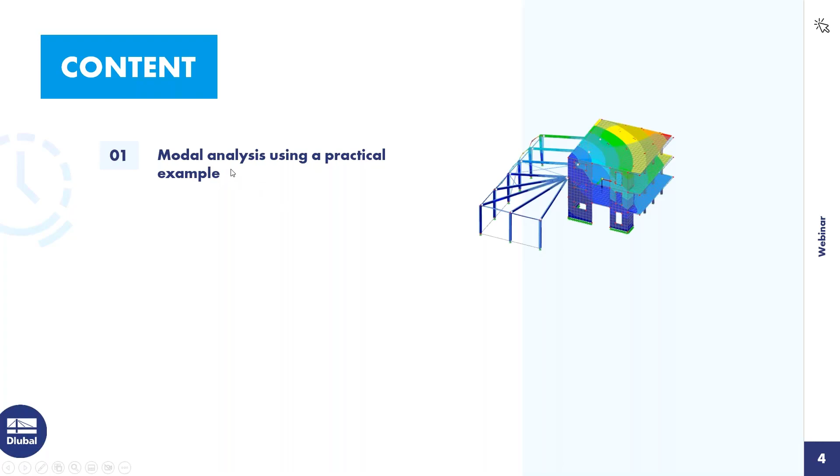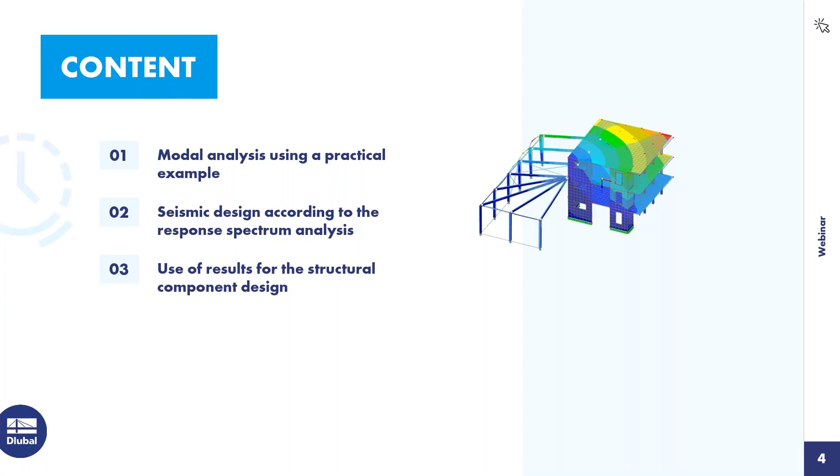To the agenda today, Stefan will start with this example, a building of concrete and steel, and he will do a modal analysis using this example. Then follows the seismic design according to the response spectrum analysis. Then he will show how you can use the results for the structural component design, and he will apply the add-on Building Model, for example, the shear walls, the forces in shear walls. Okay, then I hand over the screen to Stefan and he can start with the live presentation.

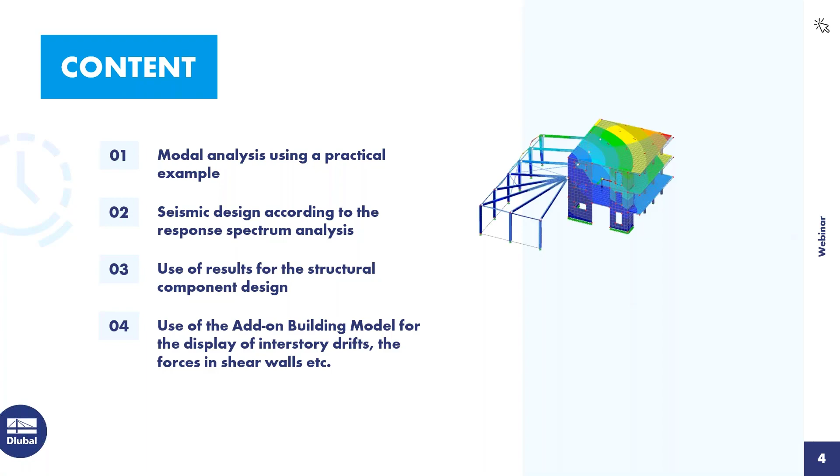Okay, thank you, Andreas. So then I think we can start here. Hopefully you see my screen. You see here a normal concrete structure. It's, for example, an office building, and here we have a steel frame structure, which is added to this concrete building. And for the whole structure, we want to do today a modal analysis and

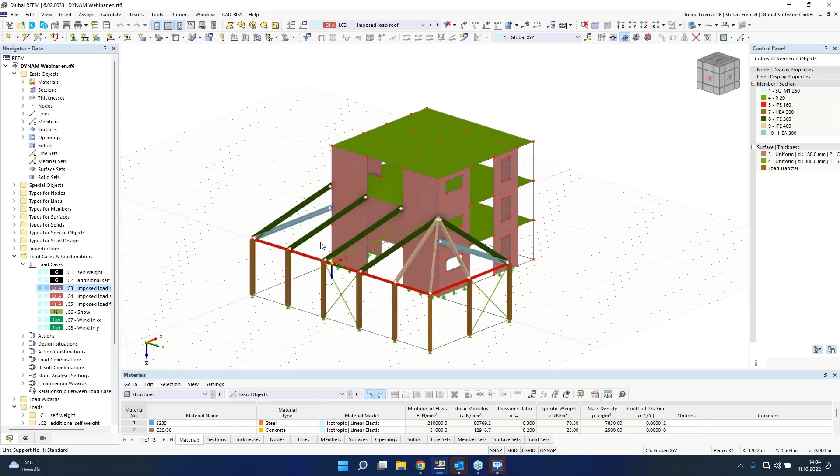a response spectrum analysis. You see, we have here different types of surfaces or thicknesses of the surfaces. So we have walls with 100 millimeters of thickness. We have here some plates with 300 millimeters of thickness, and of course, different cross-section types. So that's a regular building in this case. And at first, I want to show you what we have already in the structure.

Therefore, we can see here self-weight. It's the self-weight of the structure, therefore we don't activate here the loads at all, but you can also activate these loads. We have here an option for self-weight. We can activate this or not. It's just a structural self-weight. Another load case is an additional self-weight, which comes for the concrete surfaces. And of course, here some imposed load cases for the roof, for the second floor, for the first floor. These loads we want to use also then in the modal analysis.

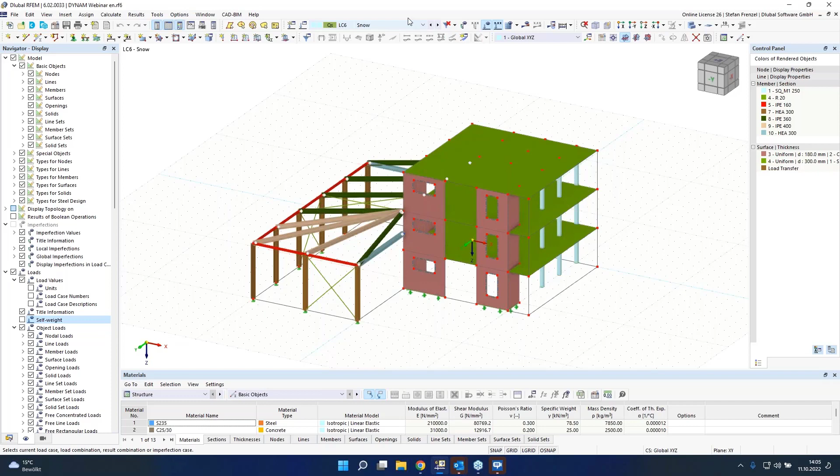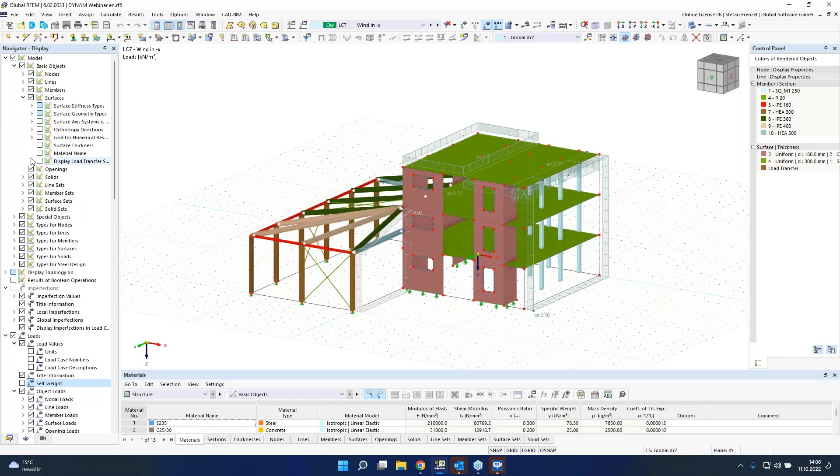And of course, you see here a snow load, which looks empty, okay. We can create a snow load, that's no problem. And of course, a wind load. For the wind load, you see that we have here already a surface load, which is applied here on this opening. So in RFEM 6, we are able to apply loads on such openings, and therefore we have here a special surface type, which is called load transfer surface. This load transfer surface is able to transfer the surface load to some elements.

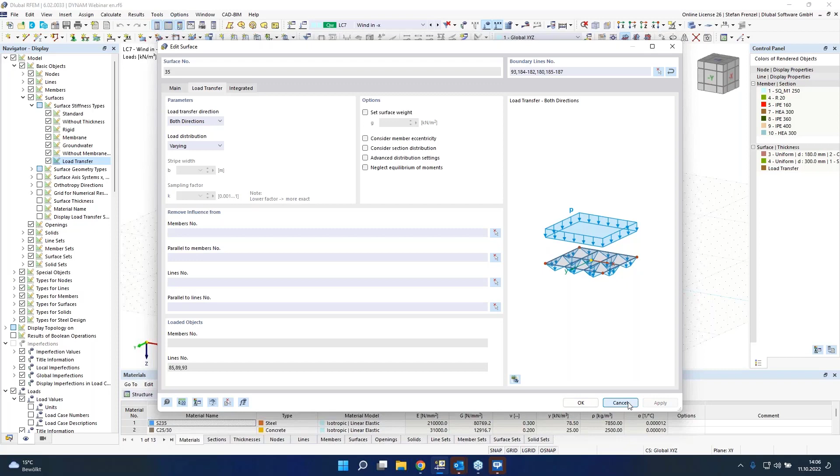For example, I will have a look in this one, and here I can see, okay, I will try to transfer the load to these lines, which are the lines from the floors, and therefore it's possible to use such a load transfer surface.

Here, of course, we have a wind load case also in the other direction. These wind load cases we want to use afterwards to compare the results between the earthquake calculation and, of course, the wind calculation. And maybe we will be able to use the wind calculation for the design checks afterwards.

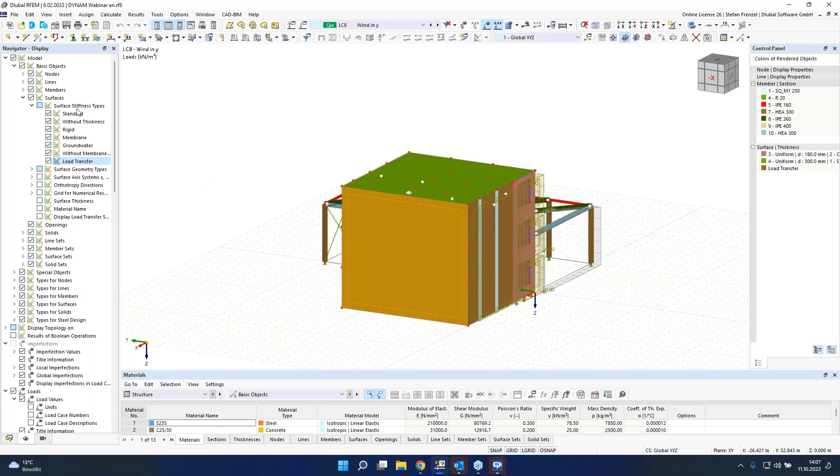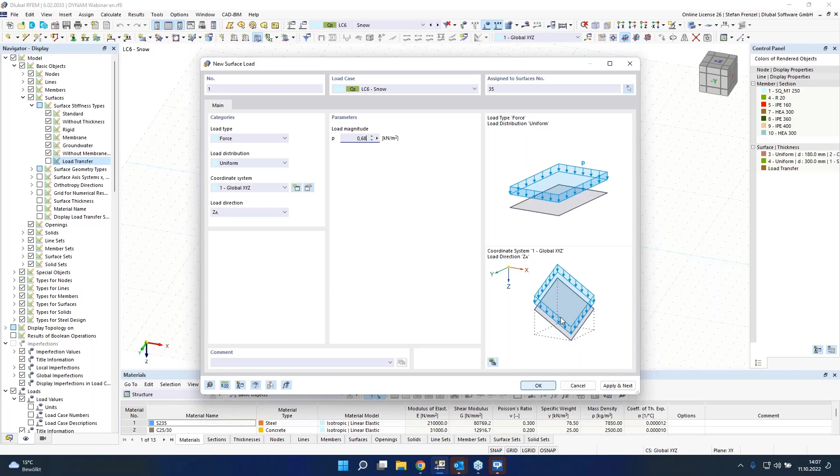Okay, I will deactivate the load transfer surface here in the first step because we don't need it directly. And then, of course, I saw that we don't have a snow load, so we want to create first a snow load. Here, we just type in 0.68 kilonewtons per square meter as load. And of course, it should be assigned to this surface. Oh, wait, I have to delete this at first, and then I can choose it. It's surface 35, and therefore I will have also now my snow loads.

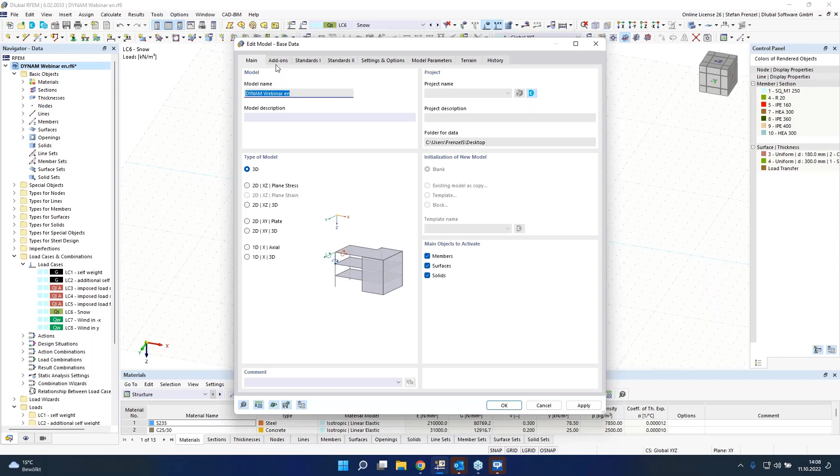So the next step is that we want to do, of course, at first a modal analysis for the structure. And if we want to do this, we have to activate the add-on module modal analysis. We can do this really easy because we just have to go here in the navigator data, and here we have base data, and in the base data we are able to choose the add-ons we want to use here in the program. Oh, I have to deactivate the steel design because we don't need it at first. And here we have the dynamic analysis part.

You see that we have here now modal analysis and response spectrum analysis for RFEM 6, and you see here some grayed out add-ons. These add-ons will come in the future, so they're not already finished, and therefore we just grayed them out. So that's just for you, so that you know what will come in the future.

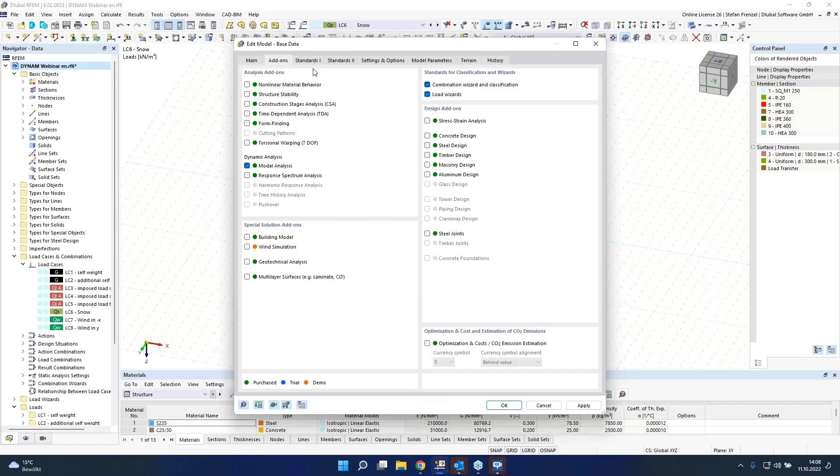Our first step should be that we want to do a modal analysis. So we have to activate the add-on modal analysis, and then we can go through the standards, because here the standards are really important for us, because at first we have to classify the weights for the earthquake or for the modal analysis, and then we have, of course, to classify the dynamic analysis settings. So which response spectrum or which national annex we want to use, for example, for the Eurocode. Here you are also able to choose another dynamic design analysis. So you can use the American standard, or you can also use some other standards you want to use.

Sometimes it could be that we have new national annexes from a new year, like here from 2021, last year for Germany. It is also possible to say, okay, we want to see also the old standards here, for example, 2011, and that you can do here with this button. In our case, we want to work, of course, with the national annex from 2021, and that should be all here at first that we have to do.

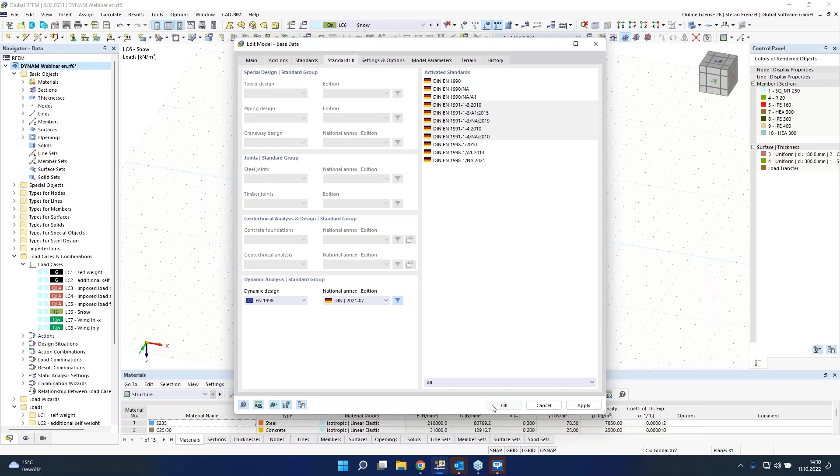So we activated now our add-on module, and the next step is that we have to create the eigenvalue calculation. So how can we do this? Maybe you know it from the old RFEM 5, you had to open an additional module where you have to give in the input data. Here in RFEM 6, we work just globally, so that means we don't have to open an add-on module, so we can do it here directly in our navigator.

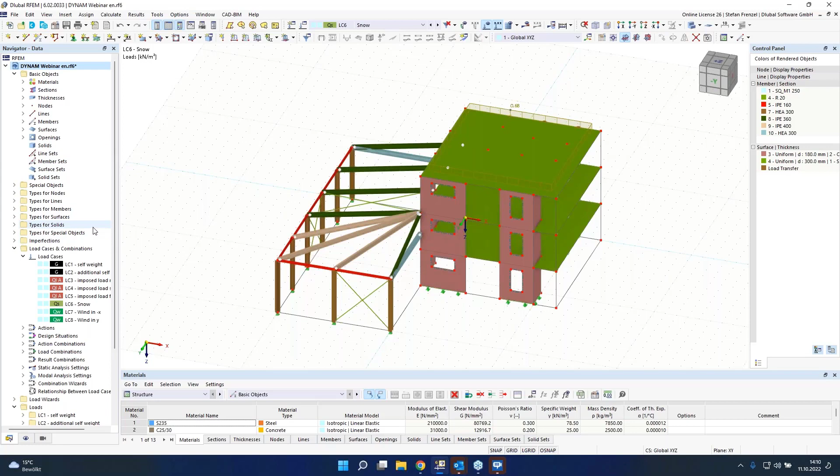Therefore, we have to create here at first a new load case, and this new load case has a category. And for this category of this load case, the analysis type is by default a static analysis. Here in our case, we want to use a modal analysis, because we activated the modal analysis in the add-on modules. And therefore, we are able to choose an analysis setting for our modal analysis, and we are able to import masses from a load case or from a load combination.

At first here, we want to change the modal analysis settings. Therefore, we can use this button here, the edit button. And for the edit button, we can say, okay, we want to have just the directions X and Y, because we want to do afterwards a response spectrum analysis. And for a response spectrum analysis, we want to use just the X and Y direction for the mathematic settings, and of course for the eigenvalues.

The number of modes should be here 30 at first, because I know the structure, that's why I use here 30. And of course, the other settings are not so important for us. So the mass conversion type, it's clear normally. You need just the Z components of the loads, and we don't want to neglect any mass. So we want to use all masses of the structure in this calculation. Then we can say here, okay. And now we are ready with the modal analysis settings.

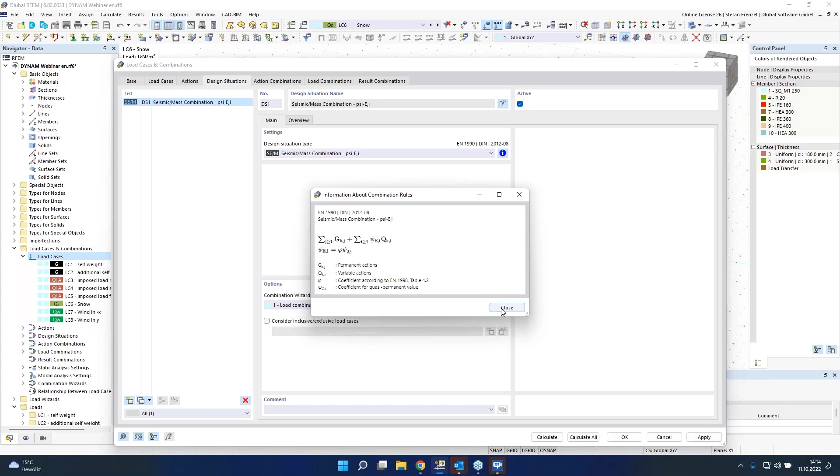That means for us, the program can use now from your design code the formulas, like here for the Eurocode 8, and can, of course, create a load combination according to this design situation, what we can use then afterwards in our load case or in our modal analysis setting. So here we can click on close. That's now at first all for us, because we can now go completely here to load combination, and the program will create directly a load combination for our modal analysis.

If we switch here to assignment, we can see, okay, here the value 0.3 is used. Of course, the snow load, we have to use the snow load in Germany. I think if you use the normal Eurocode, so without a national annex, you don't have to use it. But of course, that depends on the national annexes for each country. Here you see that we have now a psi value and a phi value. And these values, of course, are important, because it could be that these values are smaller or bigger.

So, how you can control this, that's also really easy. You can go back to the load cases, and if you are here in the load cases and in your imposed load cases, then we have, of course, an additional setting, which just comes if you activate the add-on modal analysis. And for this additional setting, you can switch between roofs and other floors. That means if you use, for example, a roof, then this psi value is another value than for other floors. And that means that the loads which you import could be smaller or could be bigger.

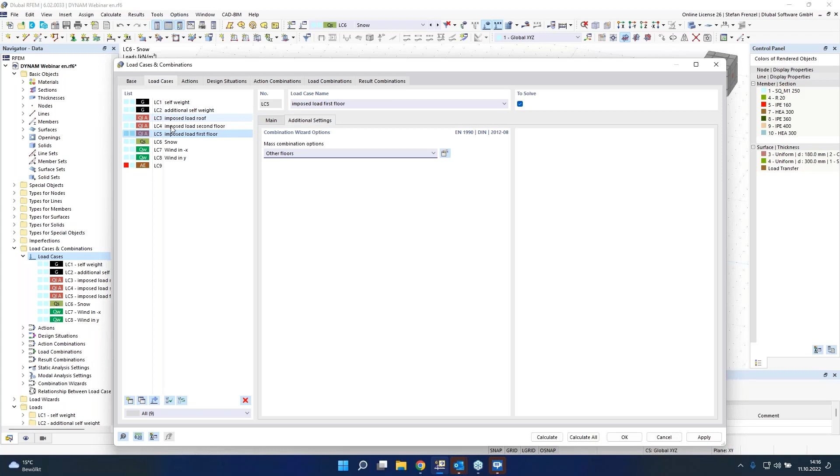Okay, then we can go back here to our load case, and we created before our load combination. It was made automatically. And here it's now possible to choose our load combination. It's load combination number 1. We want to use this load combination for the modal analysis. It means all loads which are in this load combination are calculated as masses, and just the Z direction of these masses is used. So, for example, wind loads are never considered in such a calculation because they are horizontal loads and they don't have parts which are working in that direction.

Okay, then we can click here on calculate all. The program now meshes at first the structure. Then you see that the program will calculate all load cases.

Here we have a multi-core calculation. It means in my case I have 8 CPU cores, and these 8 CPU cores calculate all load cases in one way. Okay, the result looks like this.

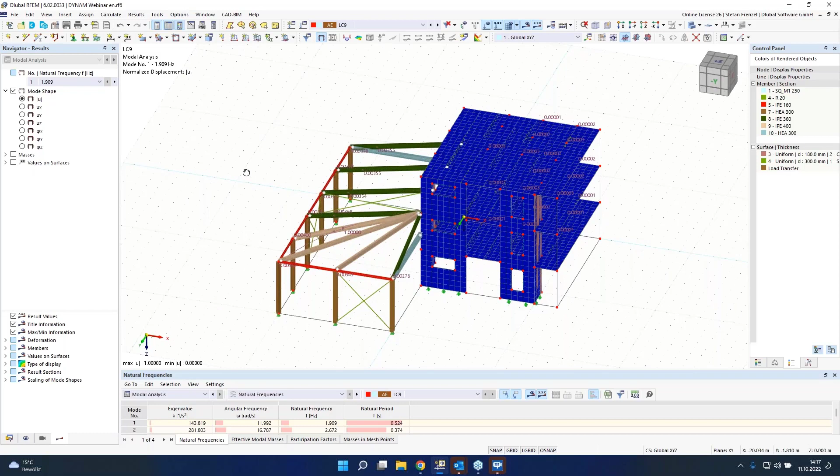So at first we have here now the result in our navigator results. We see here our natural frequency from the 1st to the 30th, and of course I have the option to have a look at the mode shape and of course at the masses. You see here in the graphic, if I rotate it a little bit, that I have, for example, here my biggest value for the deformation.

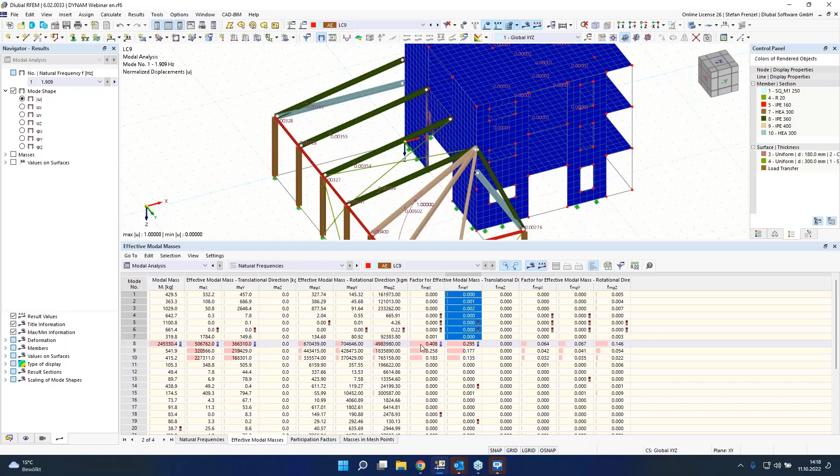If I have a look here in the table, I have many frequencies, but the important thing for an earthquake calculation is normally the effective modal masses or the effective modal mass factor. And you see that the first 7 eigenvalues are not so important for me. They are just local eigenvalues in the steel structure. For me, the first important value is the 8th eigenvalue, and the other ones, of course.

It means I need nearly 30 eigenvalues to reach the maximum of 96 or 95% in X or Y direction. And that means, okay, I have to calculate 30 eigenvalues. Maybe it's not so easy for bigger structures, because if you have to calculate more eigenvalues, then the calculation of course takes longer, and the performance is not so nice.

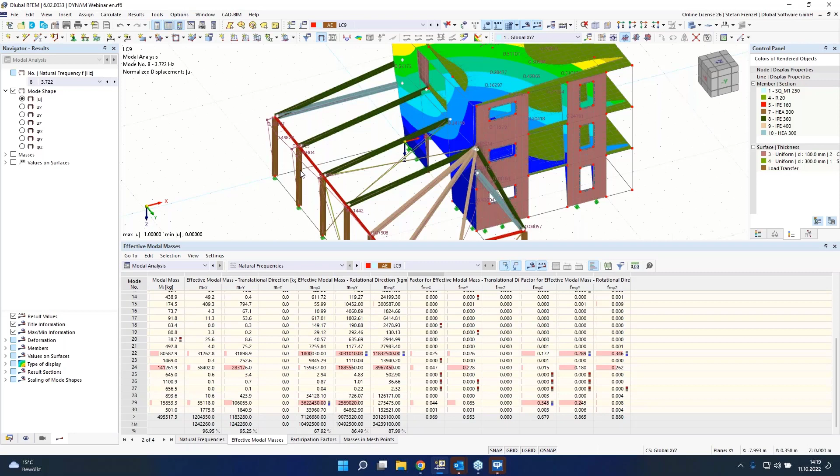It could also be that you don't reach the 90%. You calculate 20 eigenvalues and you don't reach the 90%, and that means you have to increase the values and calculate more eigenvalues. But in our case, I want to show you what we can do if we have such a problem. So in this example, we have 30 eigenvalues, but normally I want to calculate less than 30 eigenvalues.

Therefore we go back to the load cases, go on edit, and here I just copy my load case, so I get a complete copy of the load case. It's a modal analysis, the same loads are imported, and the modal analysis settings are also the same. But in this case, I will create a new modal analysis setting, and here I just want to calculate 10 eigenvalues, just in X, Y, and Z direction. So that's nearly the same option as before with the 30 eigenvalues.

And we know that the 8th, the 9th, and the 10th eigenvalue could be important for us, but I never reach the 90% with these 3 eigenvalues. Therefore we have now the option in the settings to neglect masses. Here we have 3 different types. The first one is no neglection: we don't want to neglect any masses in the structure.

Then we can neglect all masses in fixed nodes or line supports. But be careful, just in nodal and line supports, not in surface supports. And then we have the last option, user defined, which is the one we want to use. If you activate user defined, you will get a new tab which is called neglect masses.

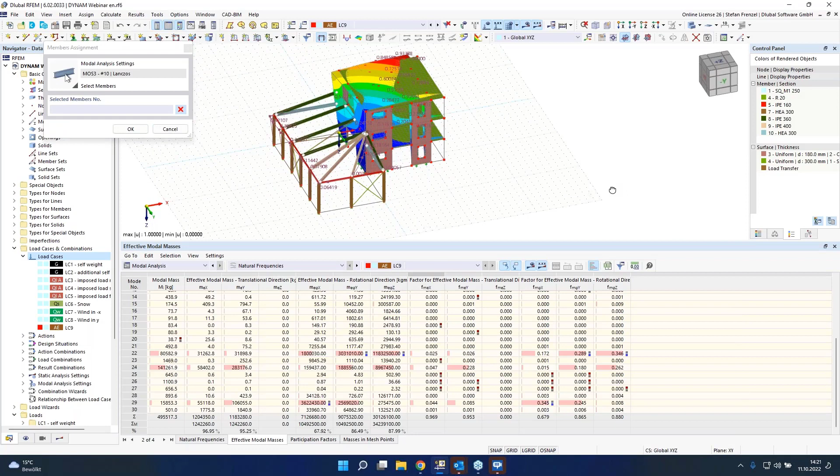Then we get an object list, and for this object list I'm able to choose the members directly here. So I want to have this member, and this member also. Click on okay, and now of course I can calculate my load case number 10.

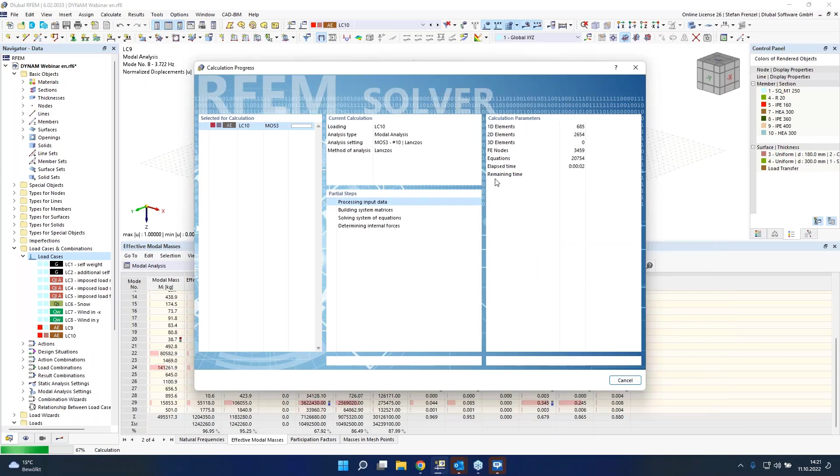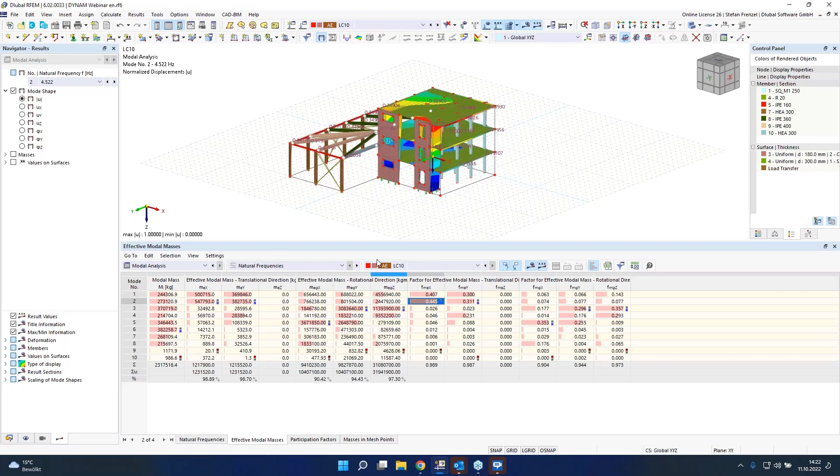Now the important thing comes, because now we will have a look at the calculation results, and we see we have 98% in each direction now, and we did this with just 10 eigenvalues. So this is more effective, because I don't need to calculate 30 or 50 eigenvalues or whatever. And here I see directly, my first eigenvalue is just on the concrete building, the second one also, and my steel structure doesn't get any eigenvalue.

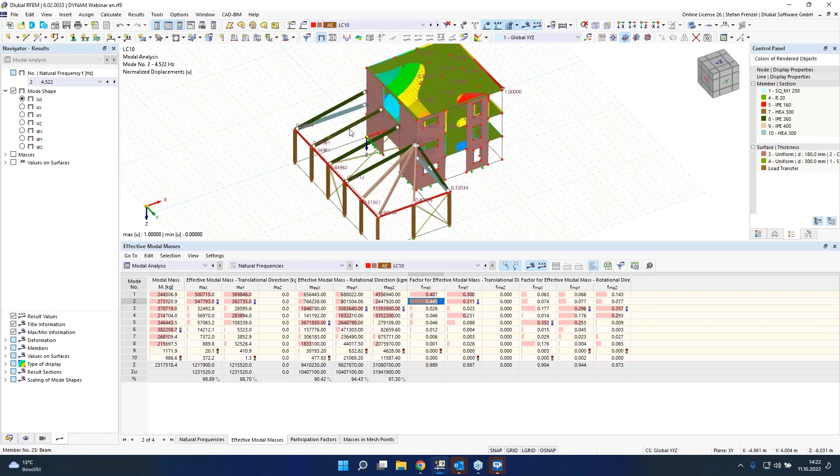I get deformations, but these deformations are just coming from the concrete building, because it's a hinged steel structure, which of course gets the same deformation as this wall here at the end. But to check it, you are able to have a look at the masses in the program.

If you activate these masses, then you can have a look here. For example, I will go in this view. Then you see that the program will create a mass ball. We call them mass balls, in each FE mesh node.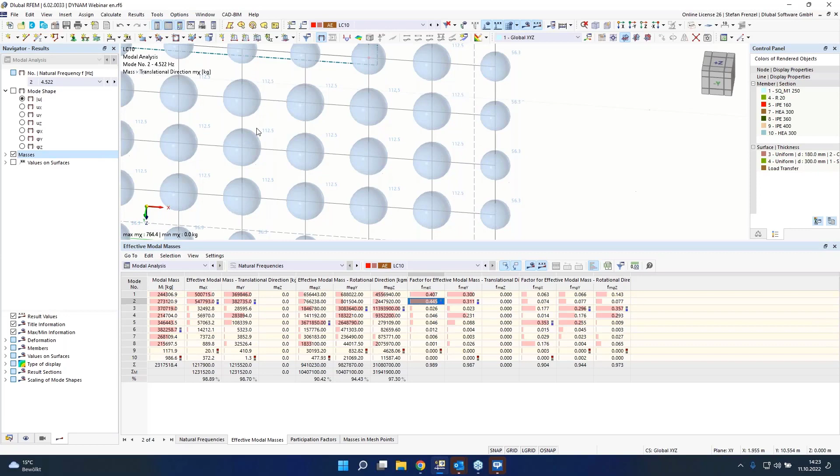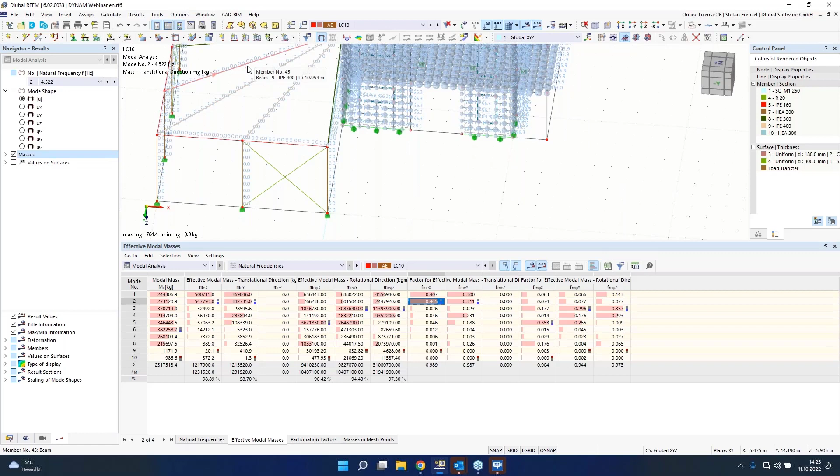For the members, we don't have any masses, so we always have a value of 0. That means these members are completely not used for the mass calculation, but the stiffness is still used. And it means these members don't get a local eigenvalue.

So we have just global eigenvalues for our structure, and that's the important thing here. Another thing is that if you look at the mode shapes, you're also able to scale them. Scaling of the mode shapes could be important for you if it's for some technical work or something like this.

And therefore you're able to change the scaling of the mode shapes here. In RFEM 5, in the add-on, you had to do it in the input data and recalculate afterwards, which was normally not necessary. That's why we changed it and created this option directly here in the results, where you're able to change the scaling.

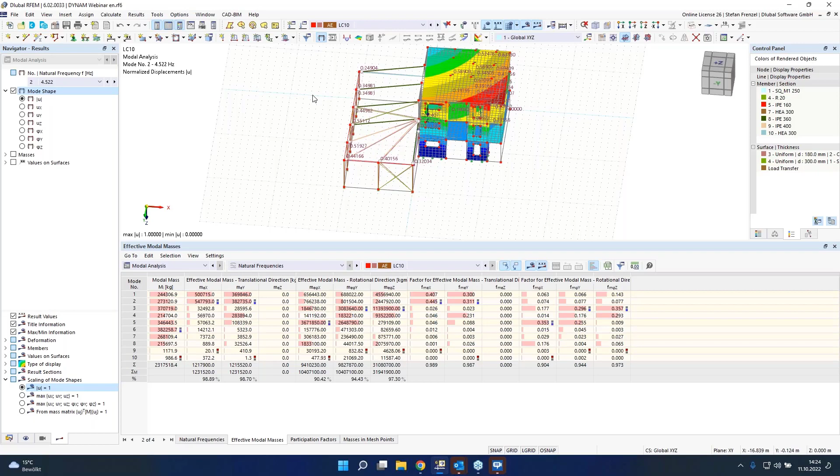If you change the scaling, of course the table also changes. Normally we always use U as 1, and that's okay for us, because here we get the highest deformation, and the highest deformation is always 1. The rest of the structure then gets the other values accordingly.

Okay, that was the modal analysis of our structure. First you saw the calculation of it, and of course the input data. Now we want to move to our next step, because with the modal analysis we did here in load case number 10, which is our important one, we can go back to the base data and activate the response spectrum analysis module.

The response spectrum analysis, maybe you know it from RFEM 5, where we had an add-on module called equivalent loads. The response spectrum analysis is nearly the same, but here we don't give you the loads at the end, we give you directly the results. That's the new thing, because in this case you save a lot of performance, since you don't have to show the loads on each FE mesh point. So you get directly the internal forces, and you'll also be able to do an analysis with these internal forces directly.

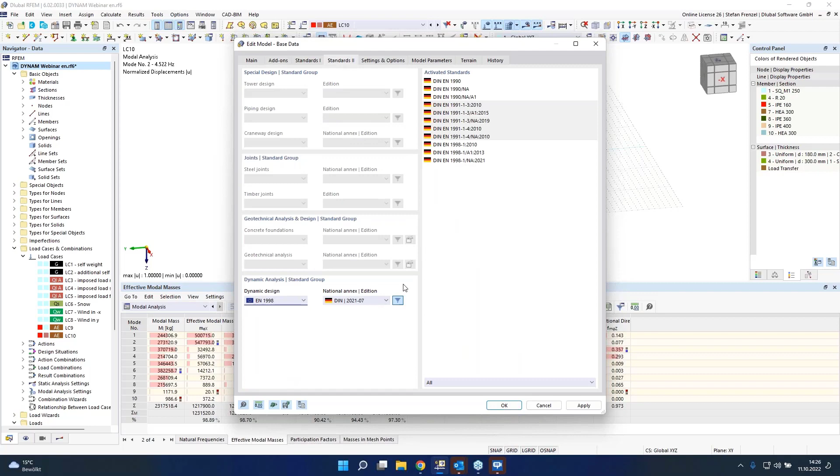So here it's activated. The standards are of course the same, so we'll use our national annex, Eurocode 8 from Germany, and that's all for now.

Here we proceed like we did for the modal analysis: we have to create a new load case, but in this load case we don't want a static analysis or a modal analysis, we want a response spectrum analysis. With this, we're able to import load case number 9 or load case number 10, meaning we can import our modal analysis. In our case we want to import load case number 10, because there we got 98% of the effective modal mass factors, which is good since we only had 10 eigenvalues.

So the next step is to create our response spectra. I'll show you the response spectra now. To create one, you just have to activate the direction, and the program will automatically create a response spectrum according to Eurocode 8. But you're also able to change this.

So what values you have to put in, that's also the important thing. I want to show you our web page. On our web page, you can find under solutions via snow load, wind speed, and seismic load maps the correct value for you, what you want to use. In our case, we go first on seismic, because we need the values for the seismic calculation.

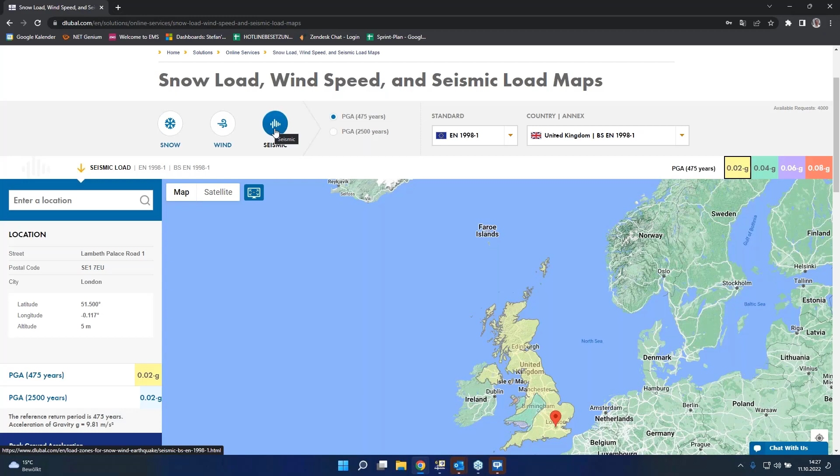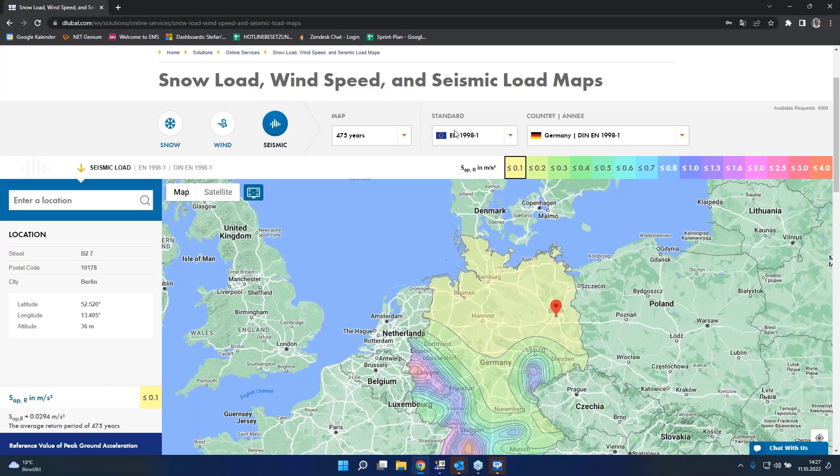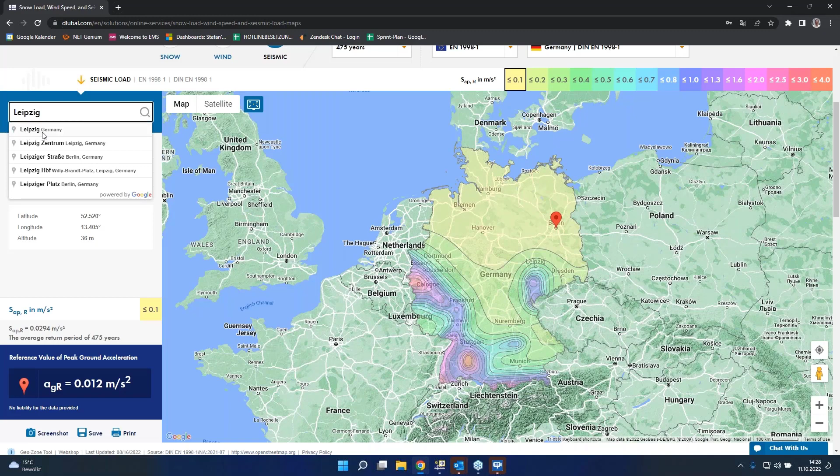We want to use, of course, the German annex, Eurocode 8 part 1. Now you see the whole map for the earthquake loads in Germany, and you can enter a location. I will enter Leipzig, because I do my webinar here in Leipzig, and I think it could be good, because here we are on the border to a seismic zone, but it's not a real seismic zone. This map looks stranger than it is.

Here we have now our reference peak ground acceleration, which is 0.169 meters per square second. This is a small value. If you go to other countries, of course, you get much higher values. So in our case, we want to use this value.

Then we can go back to our RFEM, and we just have to type it in: 0.169, and that's all at first. So our ground type, of course, should be AR.

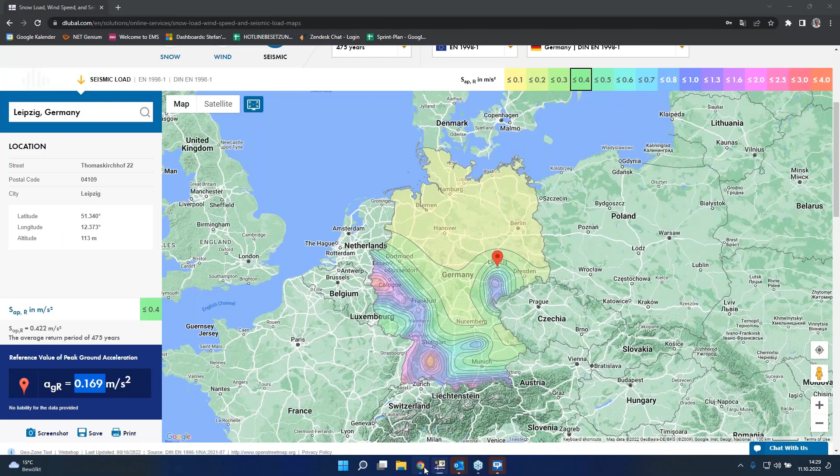Here it's also possible to change the ground type. You can find it here directly if you go to the subsoil class. For the subsoil class S, T, R, we have normally nothing like this, NA. So I took R in this case, it's okay.

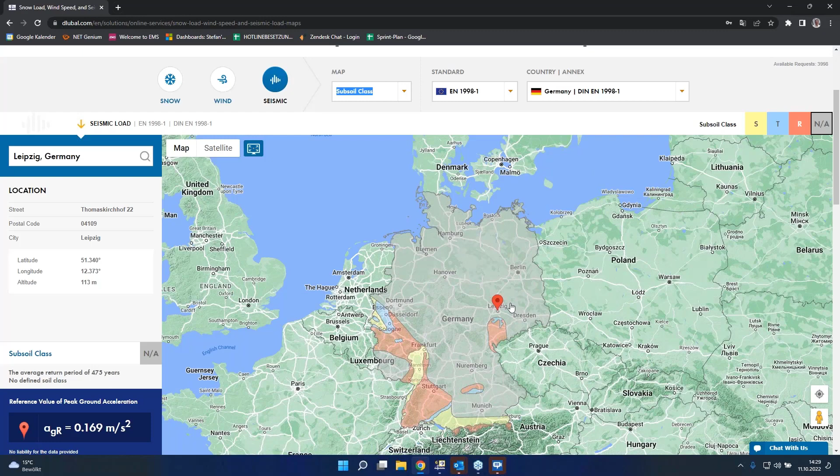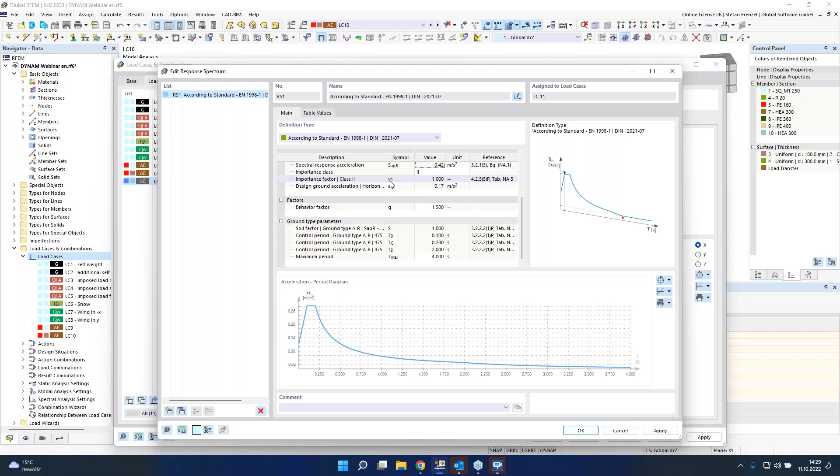That's all. That should be our setting for the standard. You are also able to change the behavior factor or whatever, that depends, of course, on your structure. In our case, we take the standard values of 1.5. That's okay for us, and then we can click here on OK.

If you have other changes, like you want to scale up the whole period or the whole diagram, then you can also scale up here if you need this. The next step is that we can go to the selection of modes, and here you see the program now has selected all 10 eigenvalues. We have 98 or 99% in each direction.

The Eurocode says normally that you just need 90%, and at least you need, of course, all eigenvalues which have a higher effective modal mass factor than 5% in this case. That's what we can do here, just by clicking on deselect modes and using this value. So we want to use the 5% value. The program is already also over 90% in some of it, but we just need 4 eigenvalues for that, and that's the important thing.

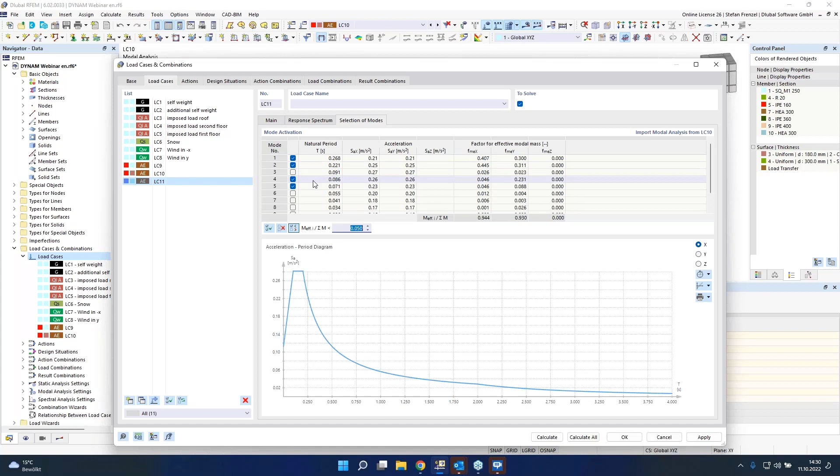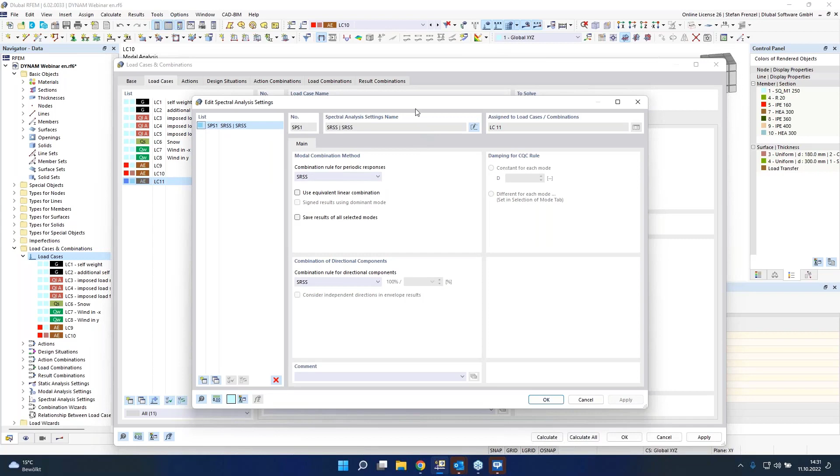So that's also a performance point, just to use the eigenvalues which you need and not all eigenvalues. Then we can go back on main, and here in the main tab we have to use, of course, our spectral analysis settings, or we have to change them. Therefore we go on edit, and in the edit button you will come to the settings, and the settings are changeable.

The first one is, of course, the combination rule for the periodic response. So here you are able to use the SRSS rule, the CQC rule, or the absolute sum rule. The Eurocode says here that you have to use the SRSS rule or the CQC rule. In some cases you have, of course, to use the CQC rule, but it depends on the values or on the difference between the eigenvalues, between two eigenvalues.

Is this difference really small? You have to use the CQC rule. Is the difference high enough? You can use the SRSS rule. That's, of course, what we want to do. We want to save all results of the selected modes. That means the program should save these results, because otherwise the program will just give the end result, and that's maybe not so good for us, because we want to know everything and use also the sub results for that.

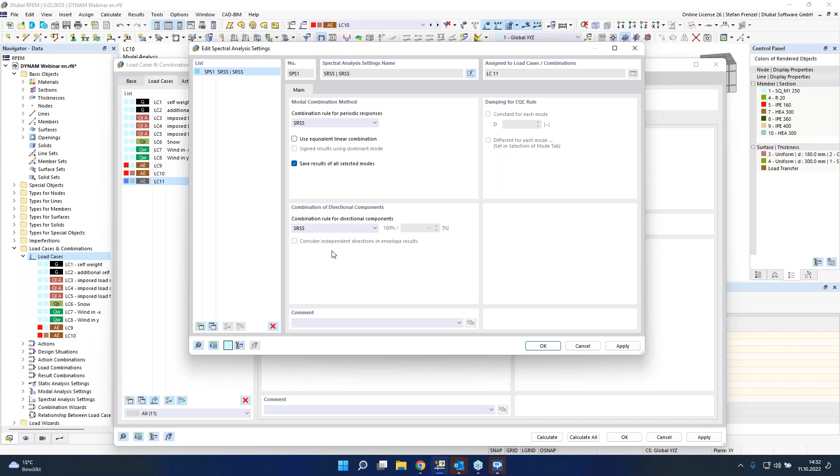The next thing is, if we have combined our directions in X and Y direction with the SRSS rule, for example, here we have to combine the X with the Y direction, and therefore the Eurocode gives us also some options. Here we have at first the SRSS rule again, which is not so effective, I would say, and then we have, of course, the scaled sum. If you activate the scaled sum, then the program will take automatically the 30% rule, but here you are able also to change the 30%, for example, to 40% or whatever you need. It's not according directly to a standard, it's according to your standard or to your behavior in this case. Okay, that's all for this, and then we can click here on OK.

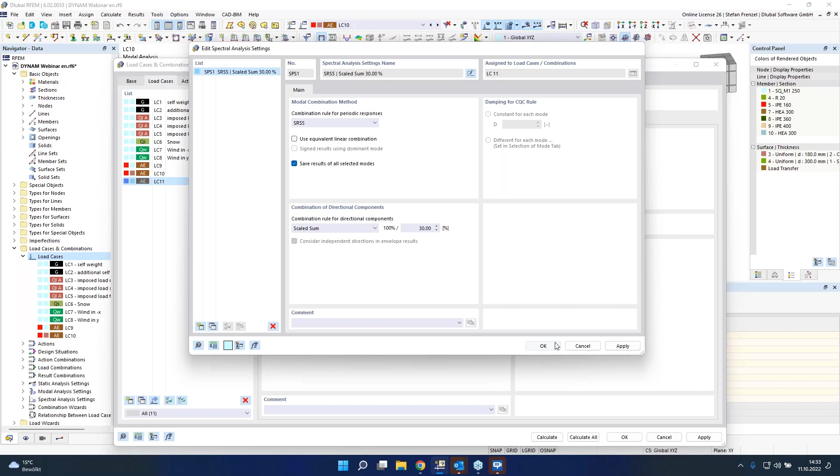For such a response spectrum analysis, the Eurocode or other design codes also say that you have to consider the accidental torsion. You are able to activate this here directly - just click it on, and the program says, okay, 5% for each direction. Then the program will give you the building length, or you can type it in manually if you want.

And so the accidental torsion is completely considered in the calculation. How it works is really easy, because internally the program will create FE loads on each FE element. The accidental torsion is considered like this: we create a small moment by the eccentricity and the force from the earthquake on each FE mesh element, and bring a small moment around the global Z axis onto it. That's the accidental torsion.

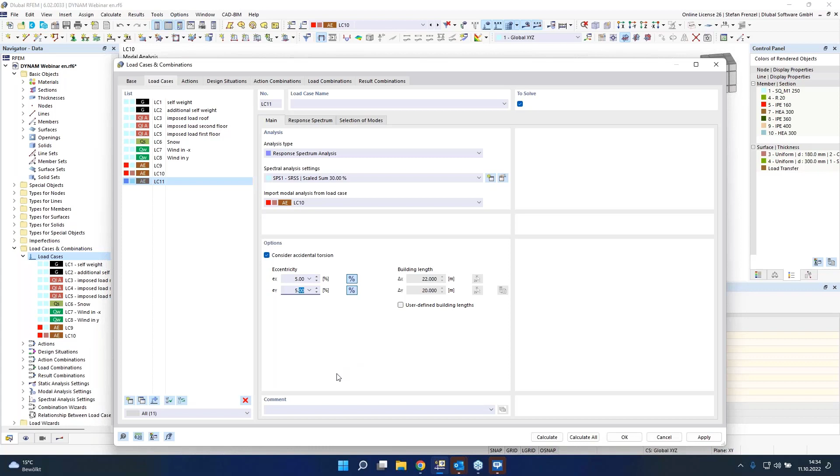This is, of course, completely done automatically. You don't have to consider this. So the next step is we calculate all.

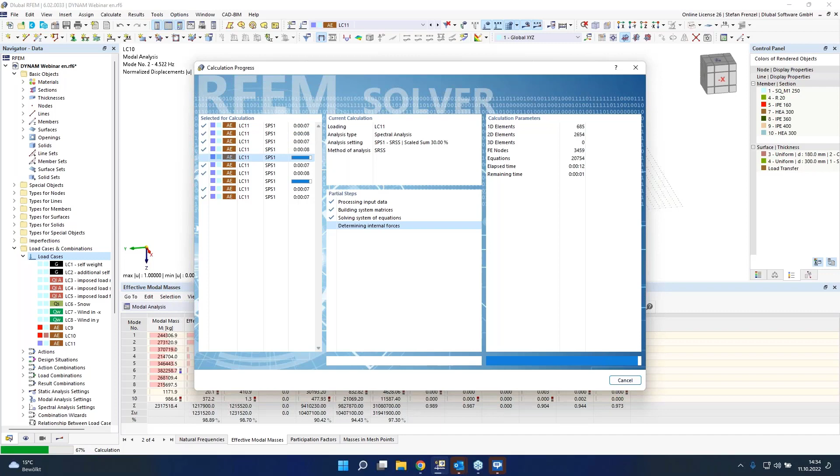Now the program will calculate sub-results for load case number 11. This is a change from Rfem 5 to Rfem 6, because here we are able to save sub-results within load cases. In Rfem 5, we had just load cases, and for each load case one result. In Rfem 6, we can save more than one result in the load case. That's a big effort, because we don't need result combinations at the end, and we are a little bit smarter in this case.

So the program calculates load case number 11. I have here an envelope, the scale sum envelope, and then the 30-100% rule. Maybe you know it from Rfem 5 - you got a result combination for the X direction, a result combination for the Y direction, result combination 30-100, and no scale sum, because you had to do it at the end manually.

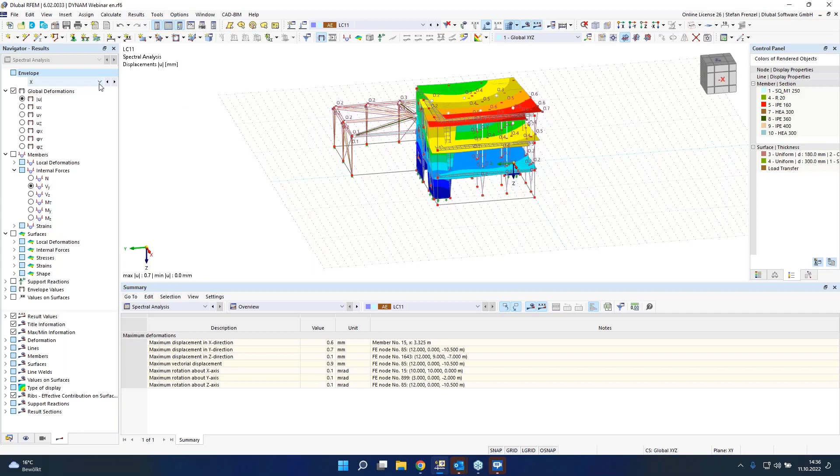Here in Rfem 6, we have it exactly for all results, and that's the effort here. But you are also able to have a look at the results directly. You can look at the internal forces, for example the normal forces, and you can also have a look at the end for the scale sum.

So that was, in this case, at first the response spectrum analysis. Now we want to have a look at how we normally need a combination, because we have just a response spectrum analysis, but we have to combine it normally with self-weight and with some imposed load cases.

Here in Rfem 6, we are able to do this also automatically, and how to do this is also new, because in Rfem 5 you had to do this manually. Here in Rfem 6, we go back in the load cases and create a new design situation - that's the easiest way. In this case we want a seismic design situation, ULS, ultimate limit state.

Oh wait, it was my fault. Edit design situation - we need a new design situation and not the old one. If we change the old one, then the results are gone. So we take here the ULS at first.

So now we have here our results for this. Of course, we can now calculate this. It should be no problem. And of course, we have now our result combination number 1 with the complete results for the seismic calculation. So, but now I don't know what I have to do here with these results. Do I need to use these results for the design or not?

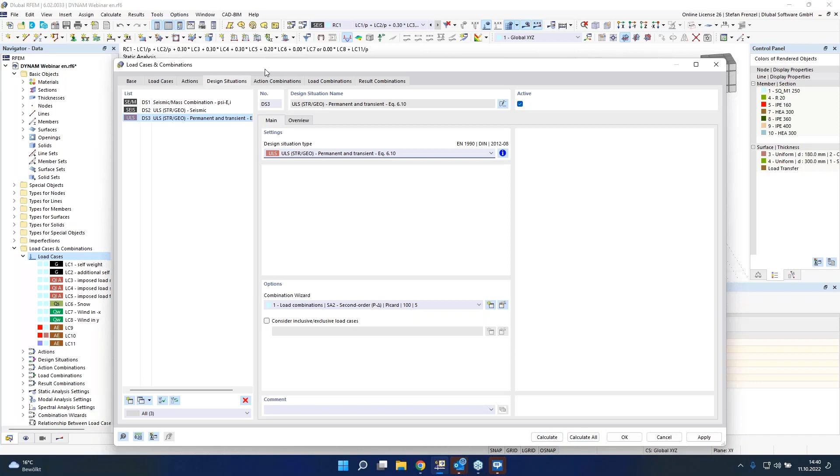Normally in Germany, or maybe also in other countries, you have to compare these results with your normal ultimate limit state calculation. And therefore we go on edit and create here a new design situation and say, okay, my new design situation should be this one here, my ultimate limit state. And afterwards, I want to compare these two with the base shear. So we go on OK; the result combination we don't need directly, but we have to calculate it all.

You see that the program now calculates all load combinations here, 8 load combinations at one time. I think it will take some seconds, because the program has to calculate now here 100 load combinations. But here maybe I can say also something to this. The program will calculate all load combinations, and you saw that these load combinations are created really fast. So that's also a big advantage of RFEM 6, because you don't have to wait so much time for that. The program will calculate 8 combinations at one time.

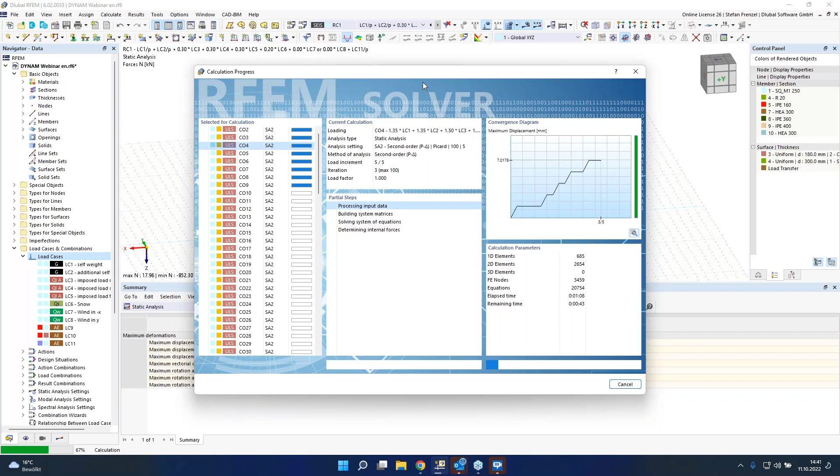The problem here, of course, is that I have load increments in it. It could take a little bit longer, but that depends always on the structure, because you have some diagonal members which could fail, and that could be the problem here. But we will wait a second, and then hopefully the program will give us a result. Now we have the result for that.

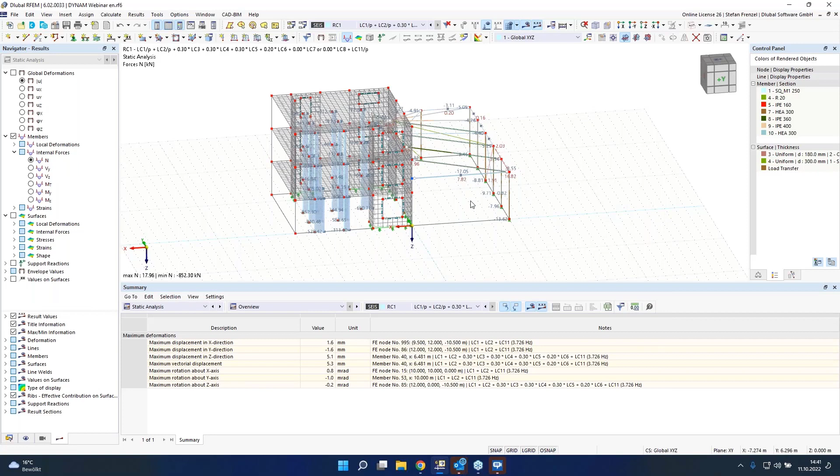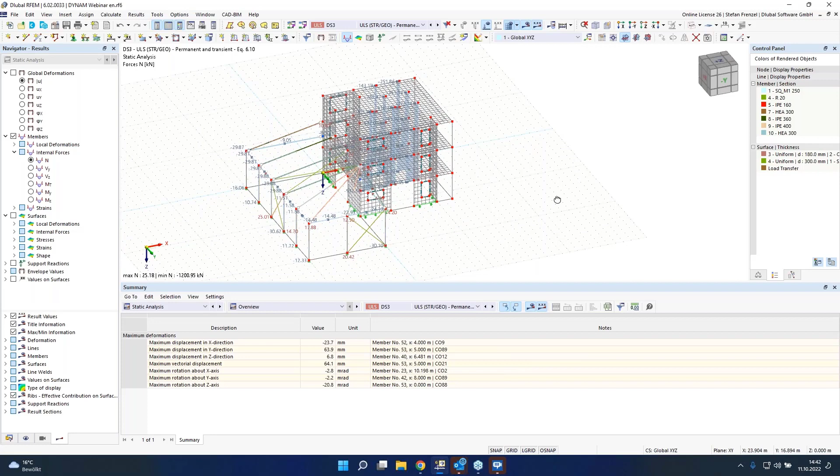And of course, here we can have a look now at the results, but I have the same problem as before. I did my static analysis, and I did my design situation. I have here also my design situation for the whole structure, but I'm not sure what's with my base shear in the structure. Is my base shear too small, or is my base shear for the ULS bigger than for my earthquake analysis? And that's now my issue.

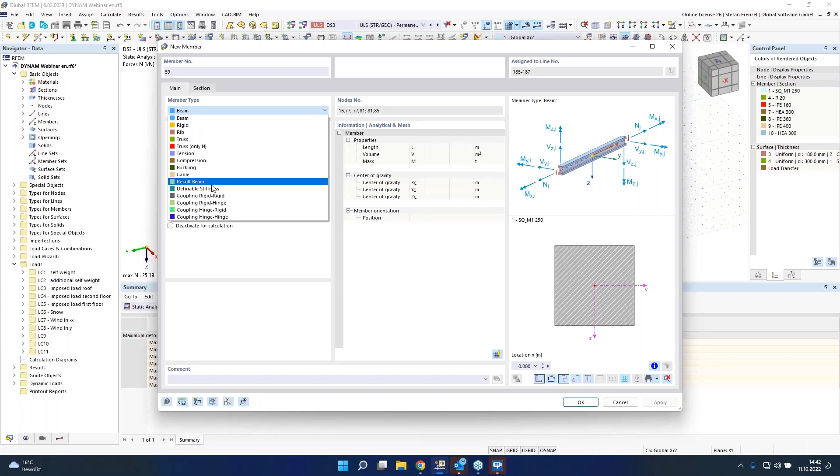And therefore we have here a new add-on, because otherwise in RFEM 5 or here in RFEM 6, it's also possible to use a result beam. That means I have to create a beam here. And here I'm able to create a member, and also able to say, okay, a result beam. Here I can integrate all surfaces and all members of the structure into member internal forces. And then I can compare the shear force of this member with these two result combinations or design situations.

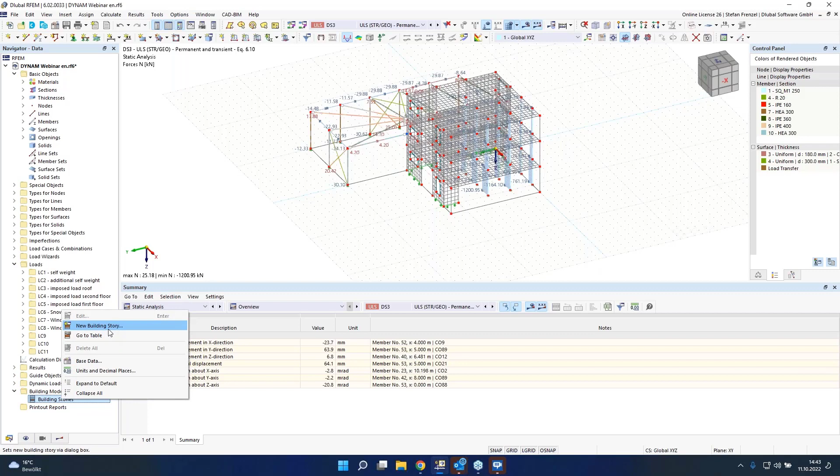But in our case today, we want to do it in a little bit different way, because we have in the base settings also a new add-on, which is called building model. And with this building model, it is possible to calculate the base shear directly. So I activated the building model, and you can find it here at the end. That means here I have to create stories now, because I need some points where I need the base shear. And therefore I can go here on new story.

The program will open a small window. Here I can also have a look at my structure, and I can say, okay, my first floor is 350 high, and of course we don't need a rigid diaphragm, because we have all floors in, and therefore we don't need the story slab stiffness. The story slab stiffness is normally used if you don't activate your real floors, because it's also possible just to calculate the walls and the columns, and therefore you can use this.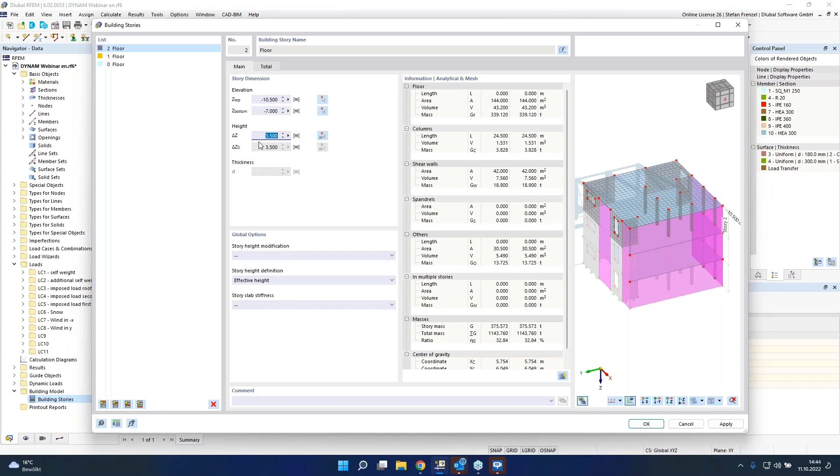Here I want to create also 2 other floors. You saw that I just clicked here on create new higher building story, and the height of course is 3.5 meters, and that is my difference in Z direction. And of course we have already the same value there. Then we can click on OK. And now of course I see here my stories, but where can I find my results for that?

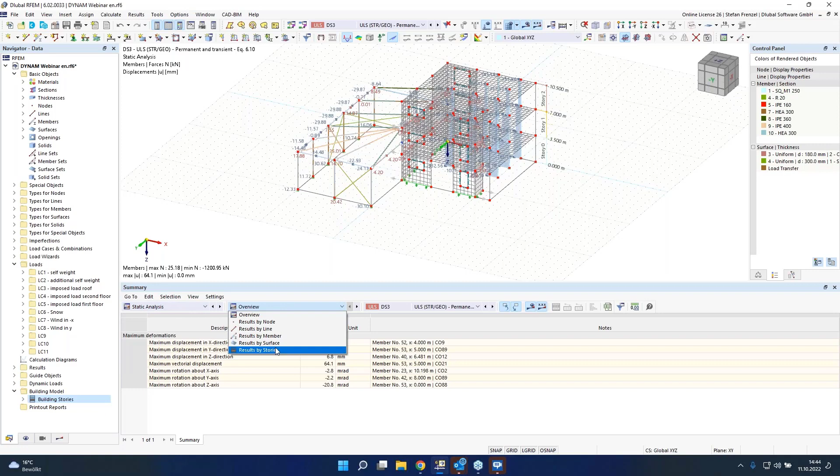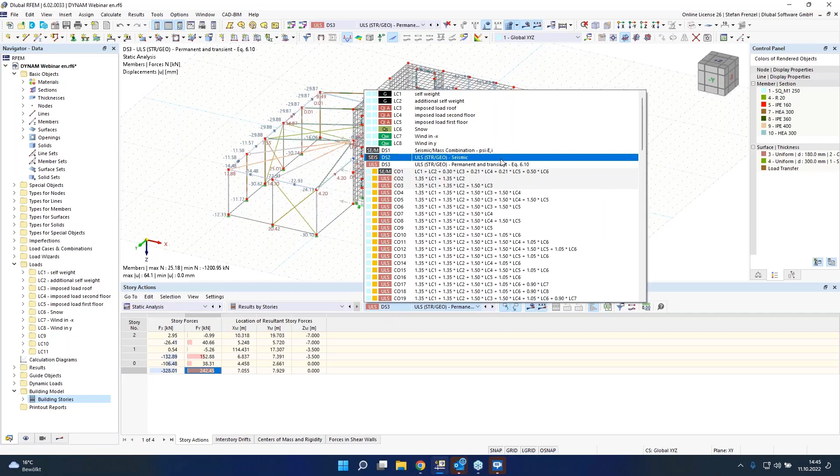And that's now the important thing, because you are able now to go here in the static analysis, for example, and you will get a new overview of results by the stories. The results by the stories for my ULS you can find in here. That means my maximum base shear in global X direction is 328 and 240 in the Y direction. Now I can also have a look on my seismic design situation. And here I have now 275 and 183. That means these 2 values are smaller than my ULS calculation.

And then I know, okay, if these values are smaller, I don't have to consider the earthquake for the design according to any standard, for example, according to Eurocode 3 or according to Eurocode 2 for the concrete. So I can use my normal loads and don't have to consider the earthquake calculation in it.

What's also important here is that you have for this building model also the option to have a look on the displacement for the interstory drift. That is also important because we want to bring in the future an add-on module which is called pushover analysis, and therefore you need the interstory drift. And here it's also important to know what to do by hand calculation now, but maybe in future we can do it also automatically to calculate if you have to consider the second order in earthquake analysis or not.

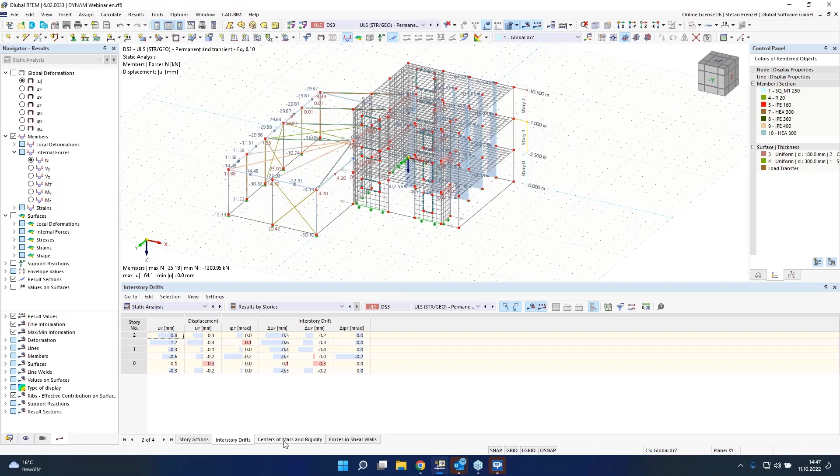That is also a point for that. So the building model will of course expand in the future and will get other options. But here are the first things what we have in the building model. You see also that you have a center of the mass and the rigidity, so you know the mass in each floor. That's also an important thing.

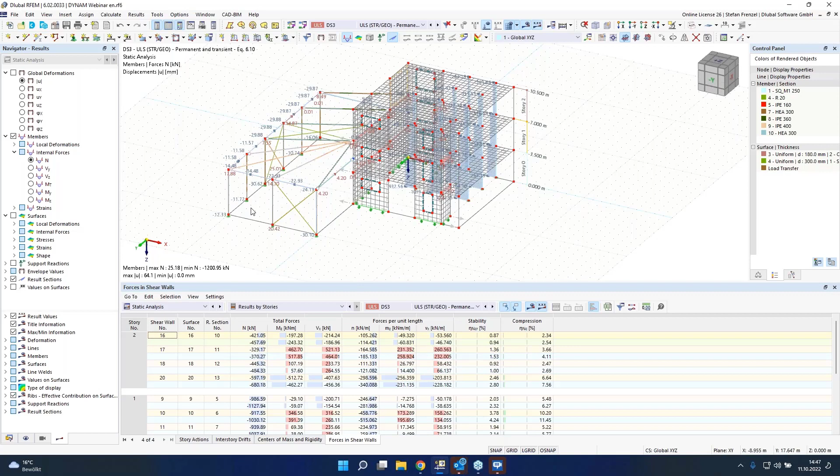And of course, the forces in the shear walls, because the program is able to create internally a result beam for each wall in the structure and to calculate the shear force for that. And with the shear force, you can easily do a shear wall design at the end. Okay, that was my presentation for today.